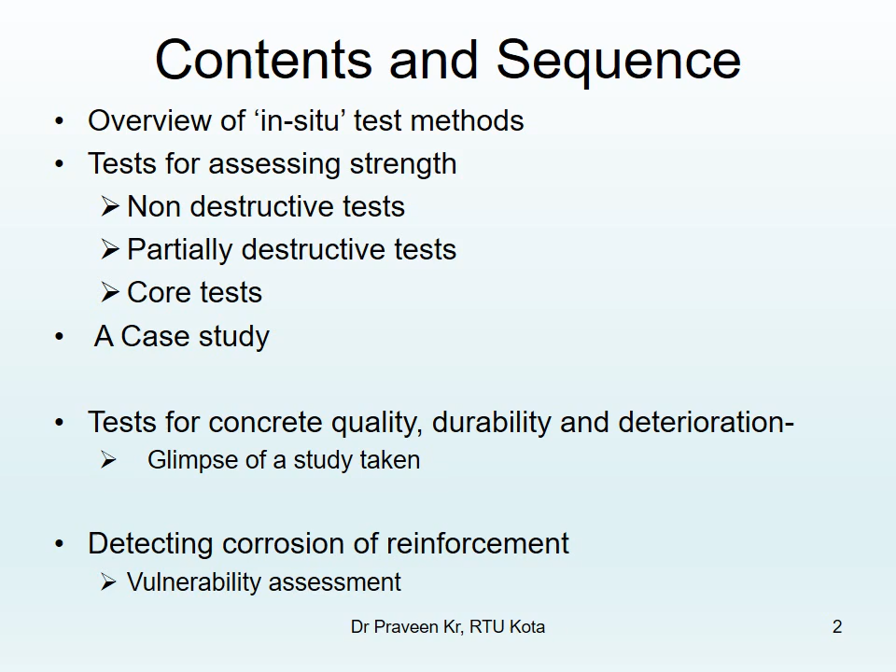Contents and sequence are shown in this slide: an overview of in situ test methods, including tests for assessing strength that are purely non-destructive. This slide lists the different methods. For concrete strength assessment, we have 9 methods.

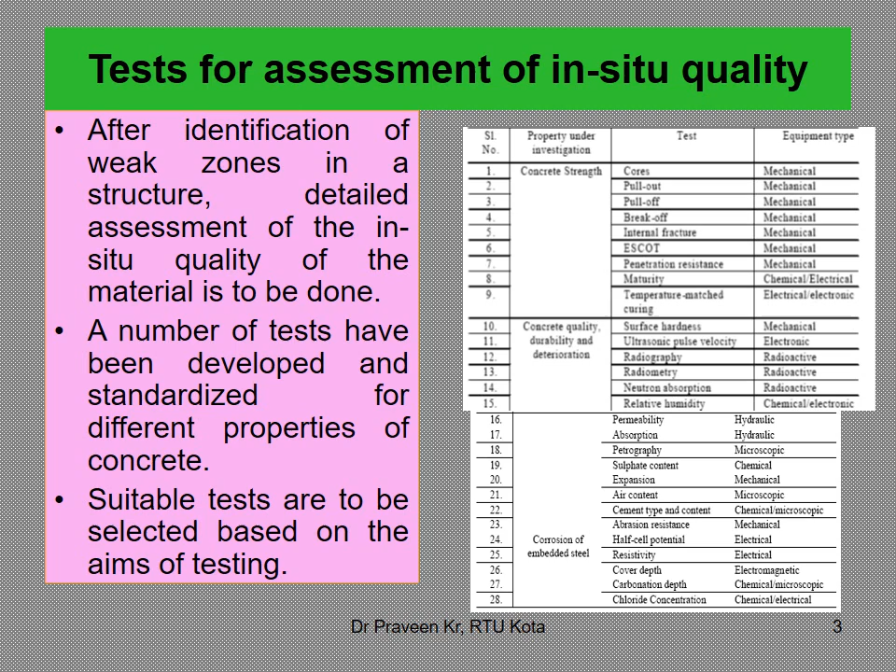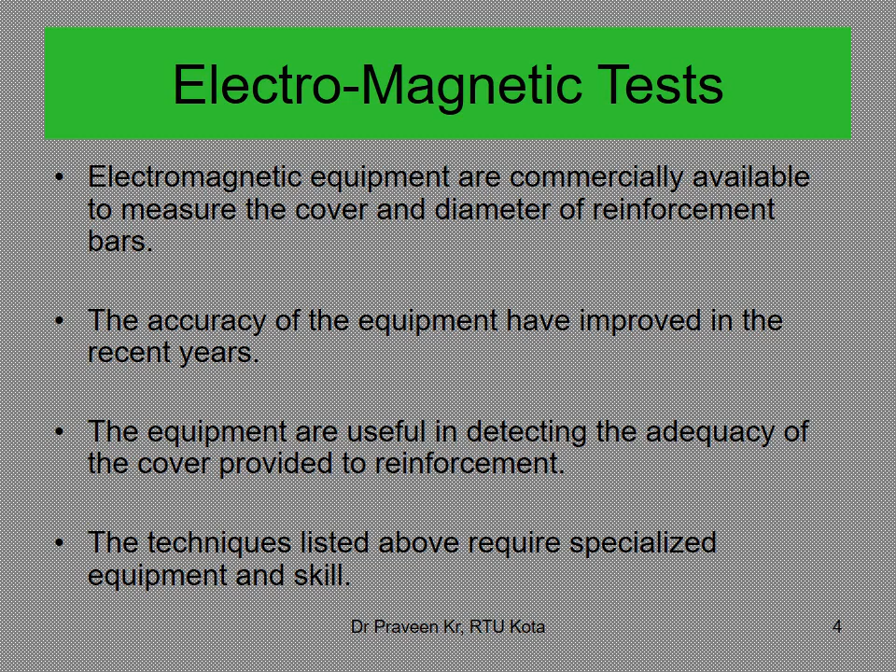Let's start with electromagnetic tests. The equipment is useful in detecting the adequacy of the cover reinforcement. It locates rebars, and measures concrete cover and rebar diameter.

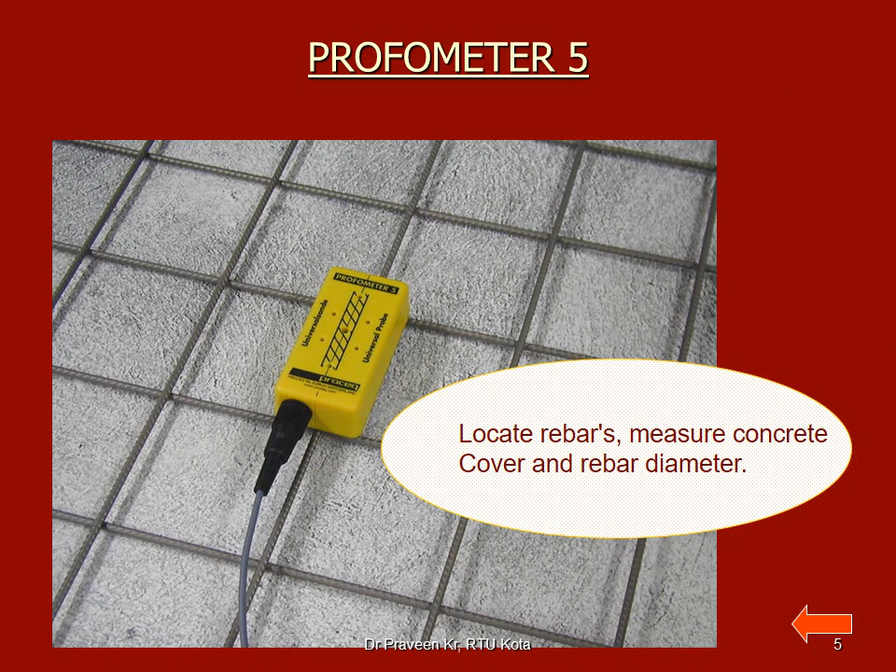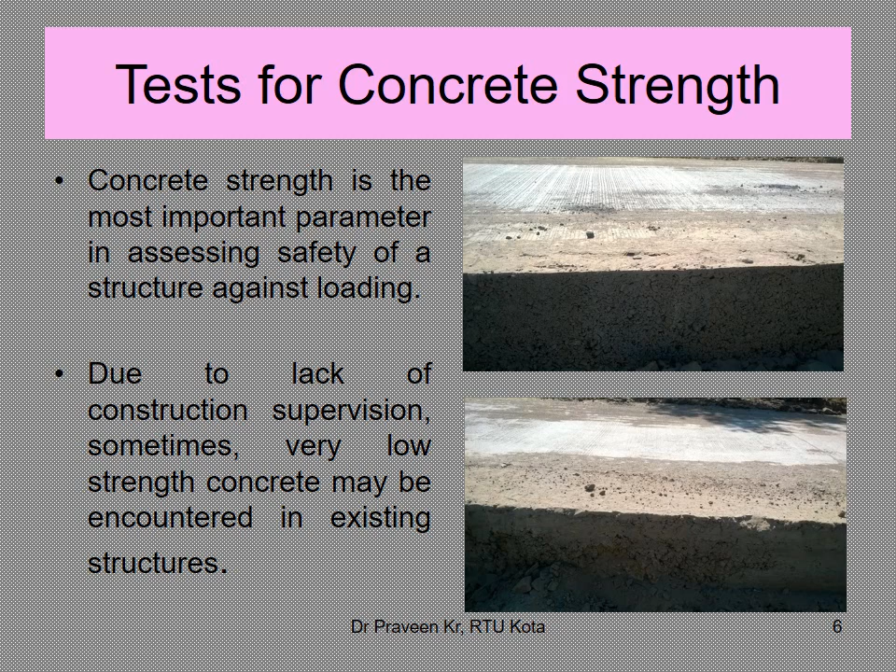Let's start non-destructive test methods for strength assessment. This may be required in the case of small deterioration or distress structures.

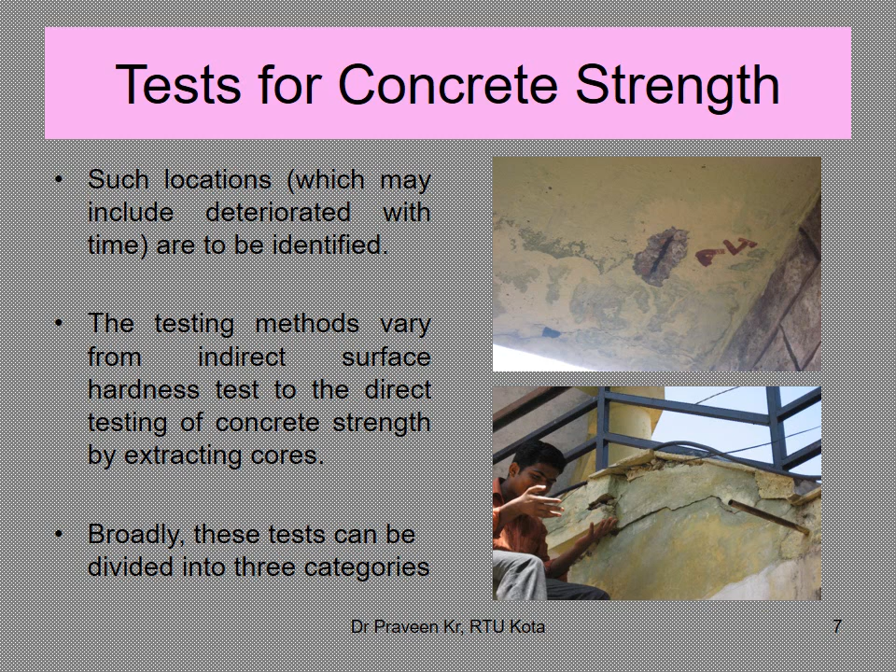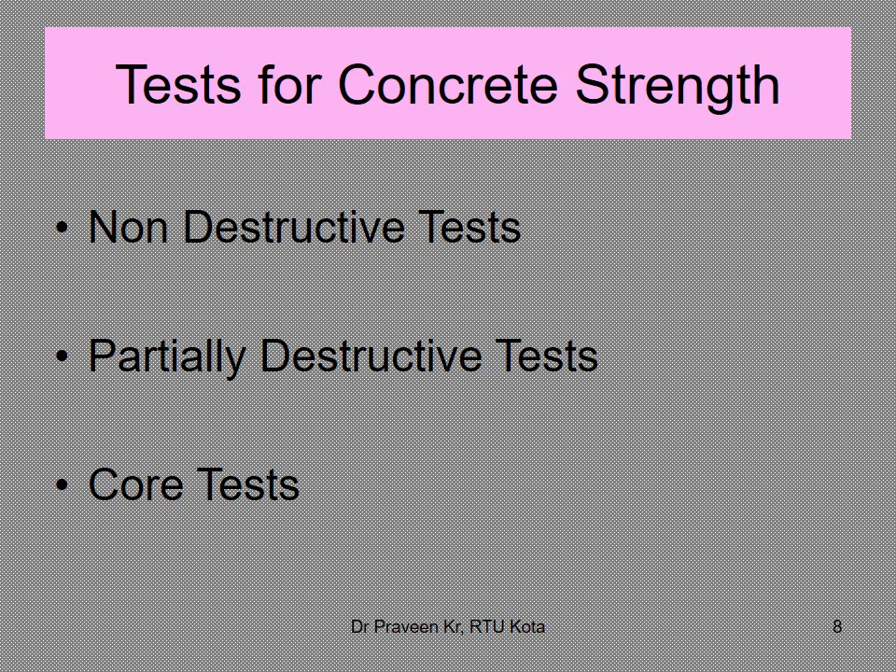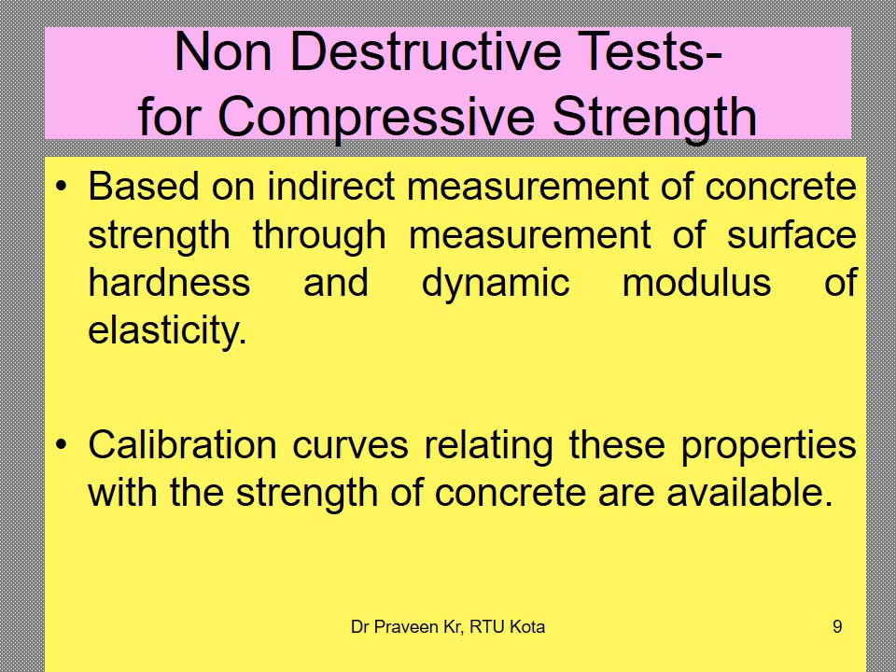Firstly, we shall discuss purely non-destructive tests, which are based on indirect measurement of strength through measurement of surface hardness and dynamic modulus of elasticity. The most commonly used instruments are the rebound hammer test and the ultrasonic pulse velocity test method.

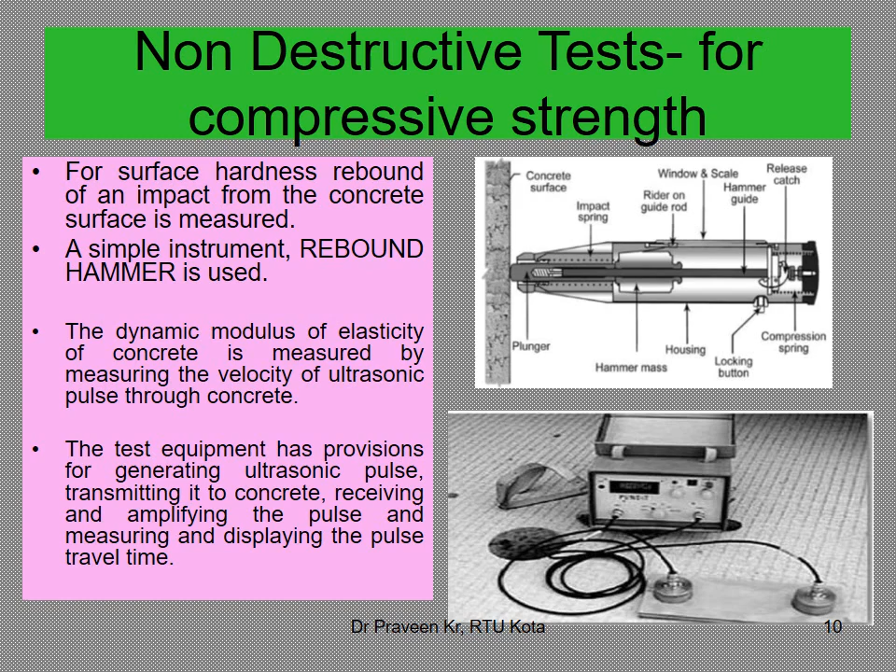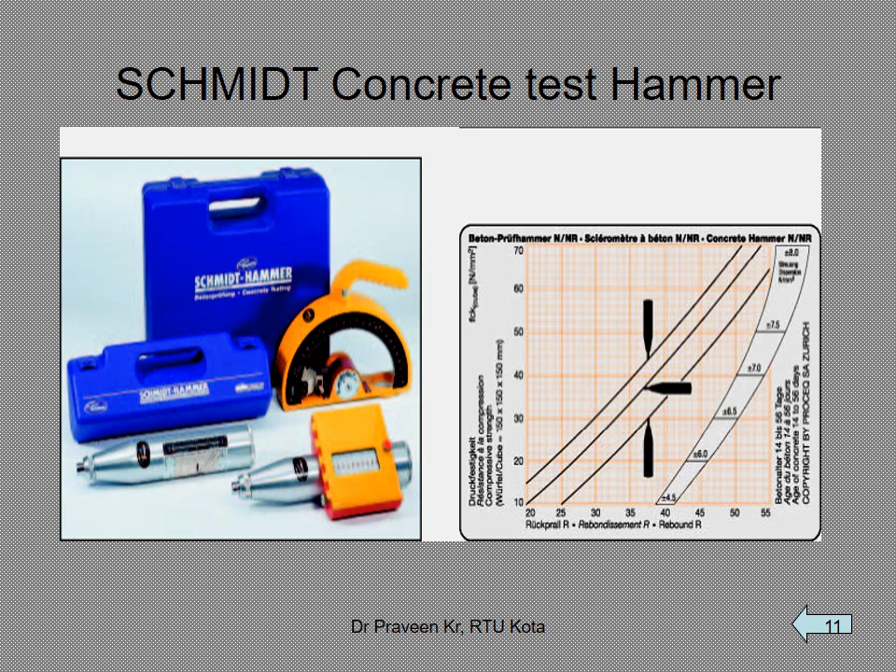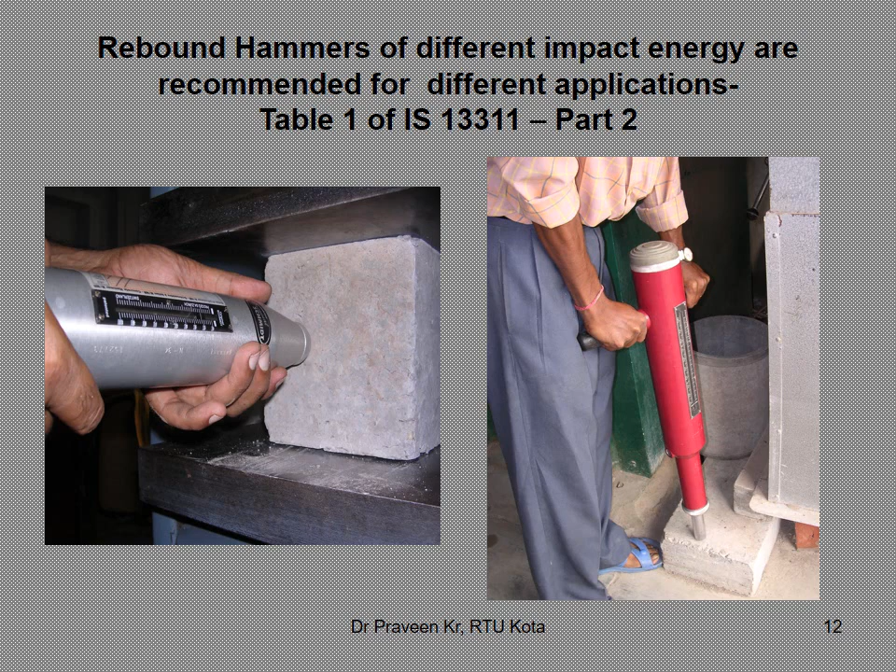Rebound test hammer involves some calibration curves in different conditions. These rebound hammers of different impact energy are recommended for different applications. The right hand side photograph shows a big hammer used.

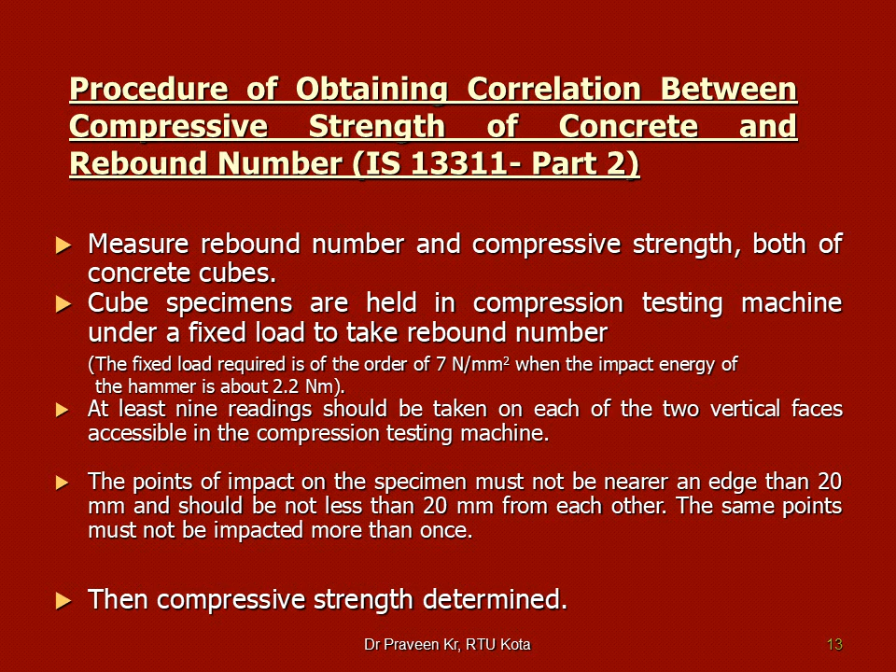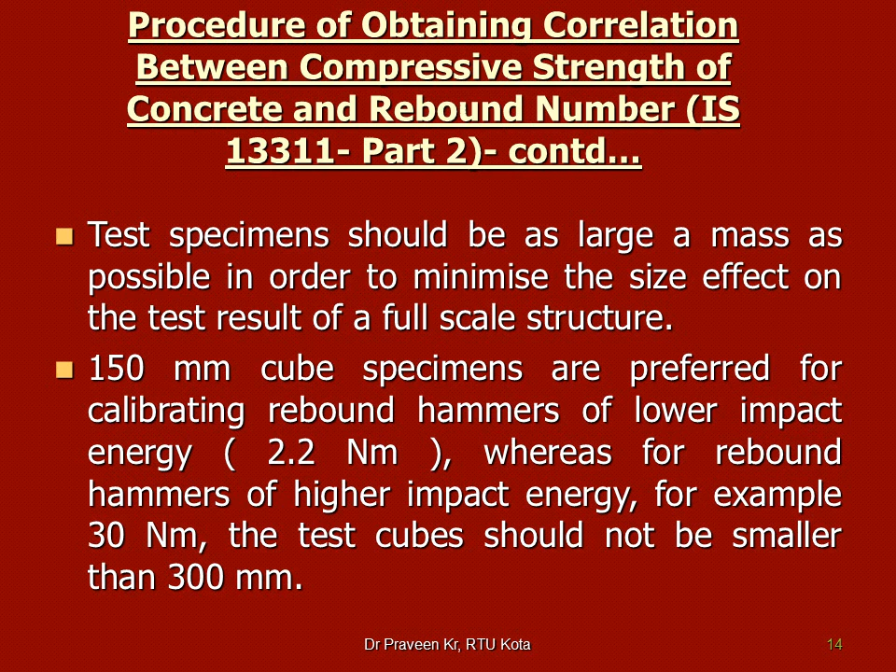The procedure for obtaining correlation between compressive strength of concrete and rebound number is listed in IS 13311 part 2. This involves testing on cubes held in the compression testing machine, taking the rebound number, then testing the cube.

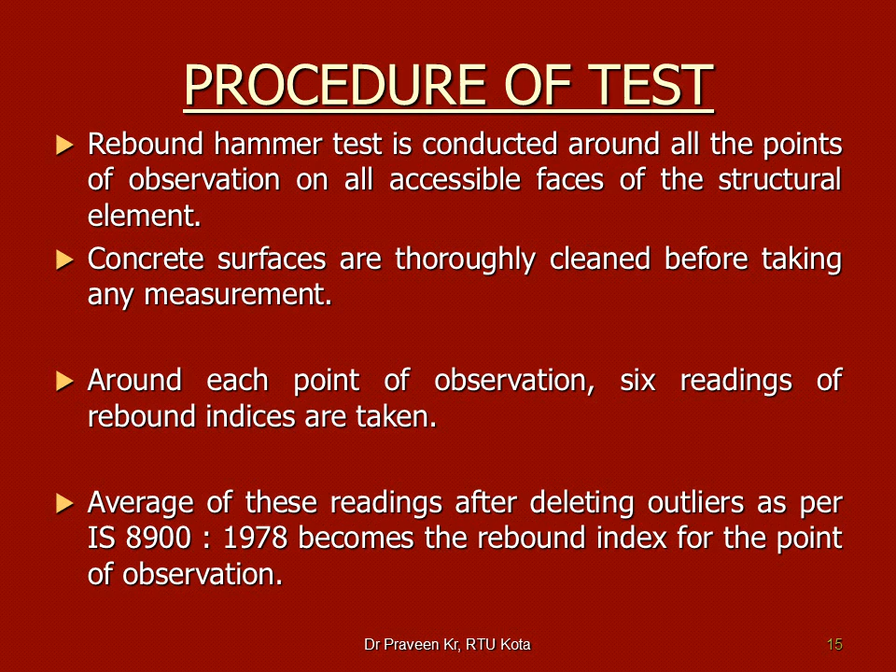In the field, when we use the rebound hammer, at least 6 readings must be taken around each location. We take the average of these readings after deleting outliers.

These two methods are robust and straightforward in application. They are inexpensive and relatively fast.

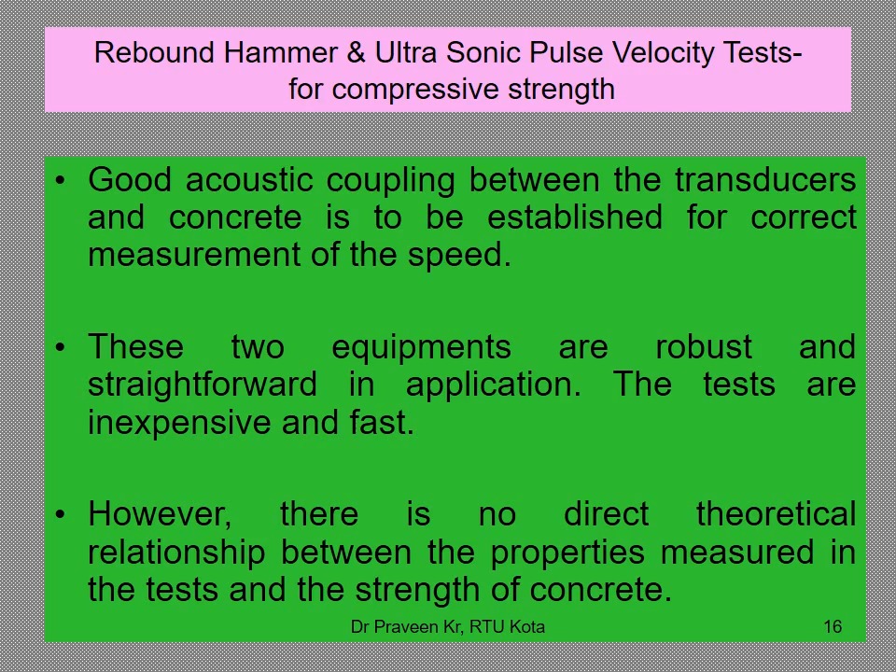As shown in this photograph, the ultrasonic pulse velocity meter has two transducers; one is the emitter, the other is the receiver.

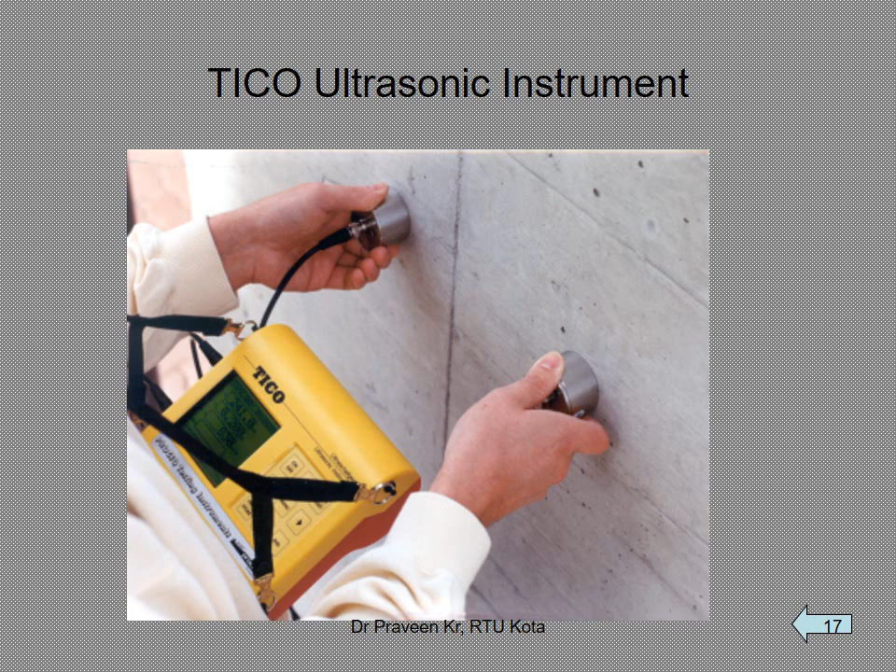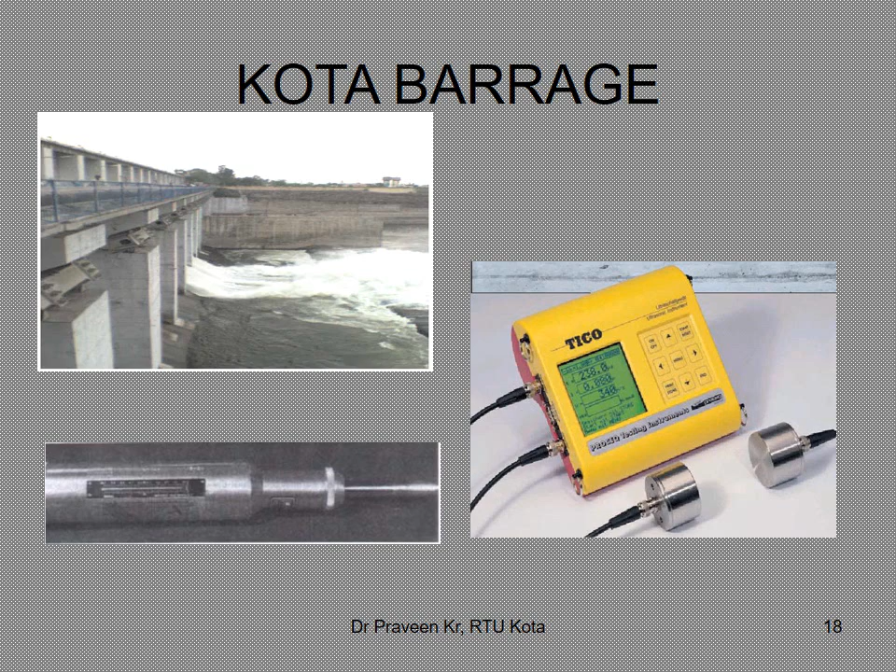We used this UPV and rebound hammer for assessment of the stilling basin of the Kota barrage about 12-13 years ago. Some minor cracks were observed in the stilling basin platform. Our students went downwards and took readings by the rebound hammer, as shown in this third position.

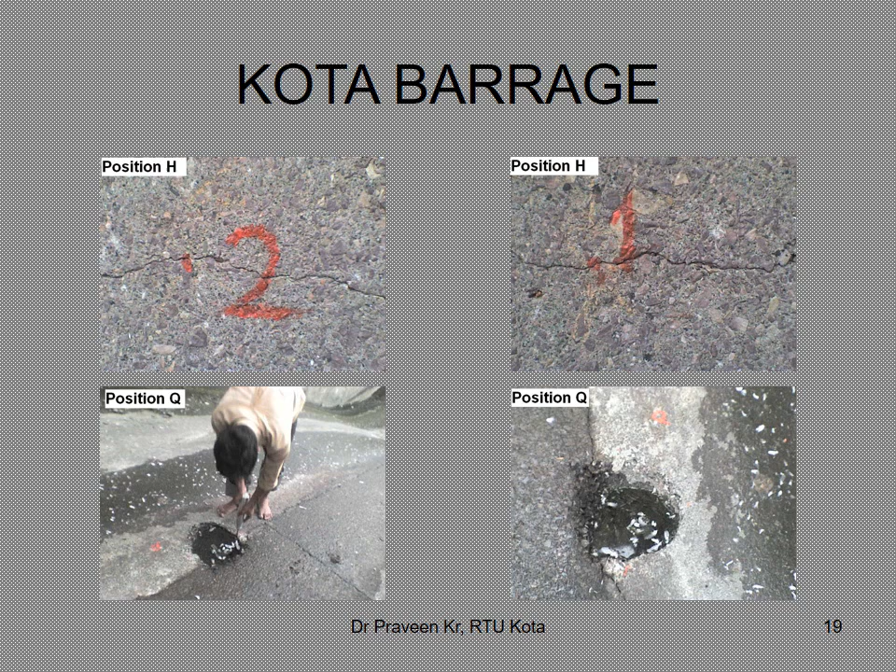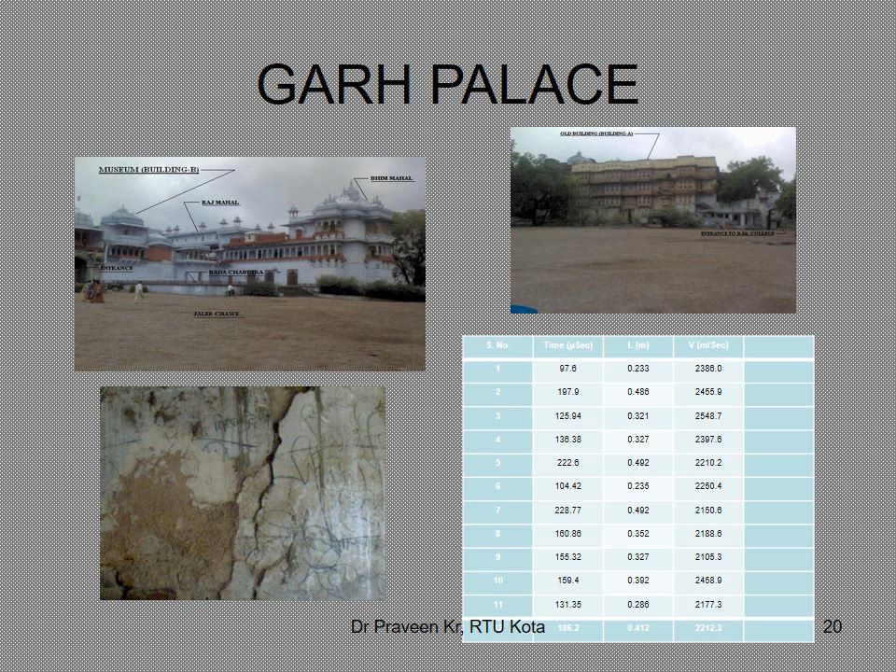Similarly, they went to the Garh Palace structures and took UPV readings at so many places at that time, 13 years ago. However, more tests are required for reliable estimation.

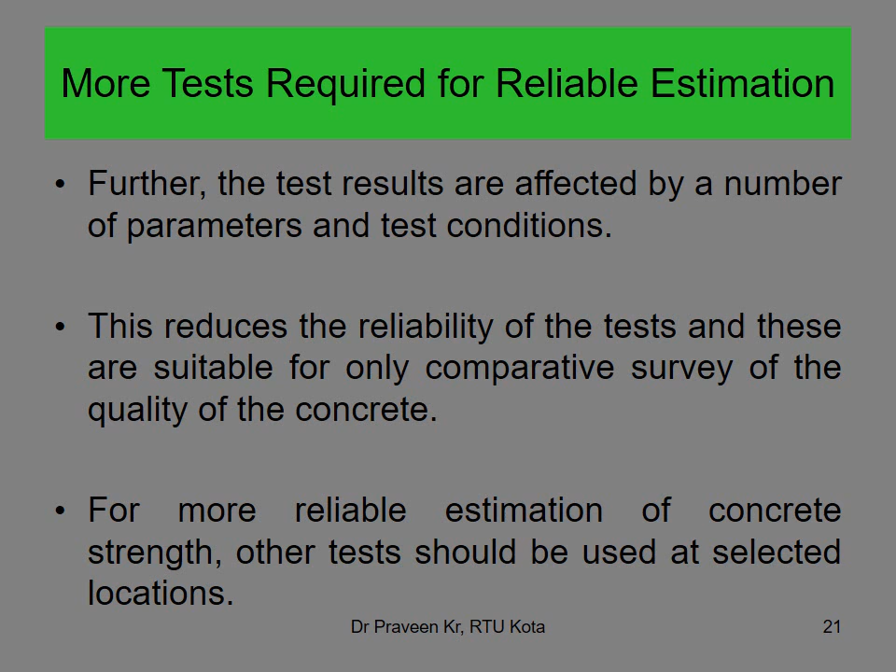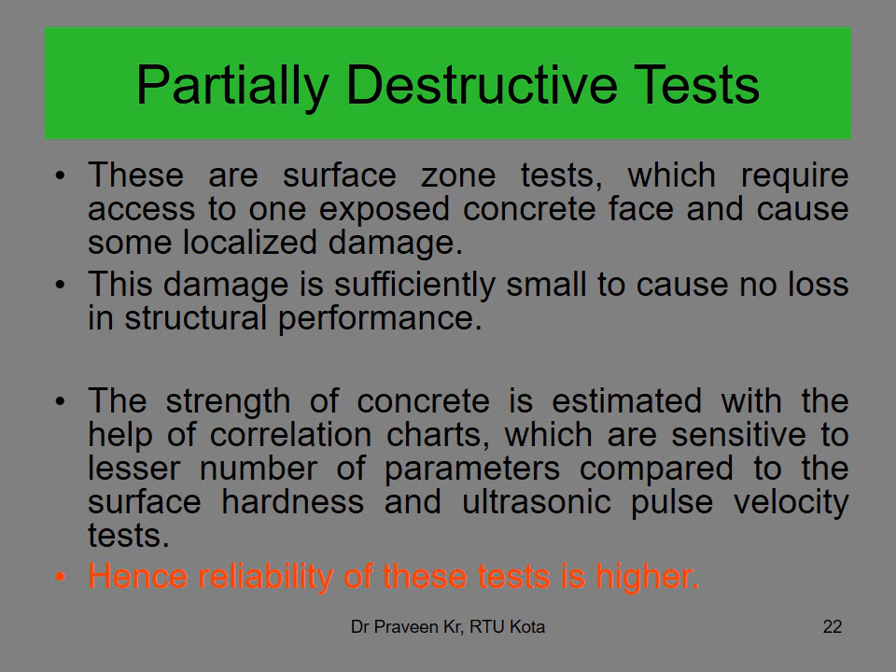Partially destructive tests are generally surface zone tests which require access to one exposed surface, and the strength of concrete is estimated with the help of a correlation chart.

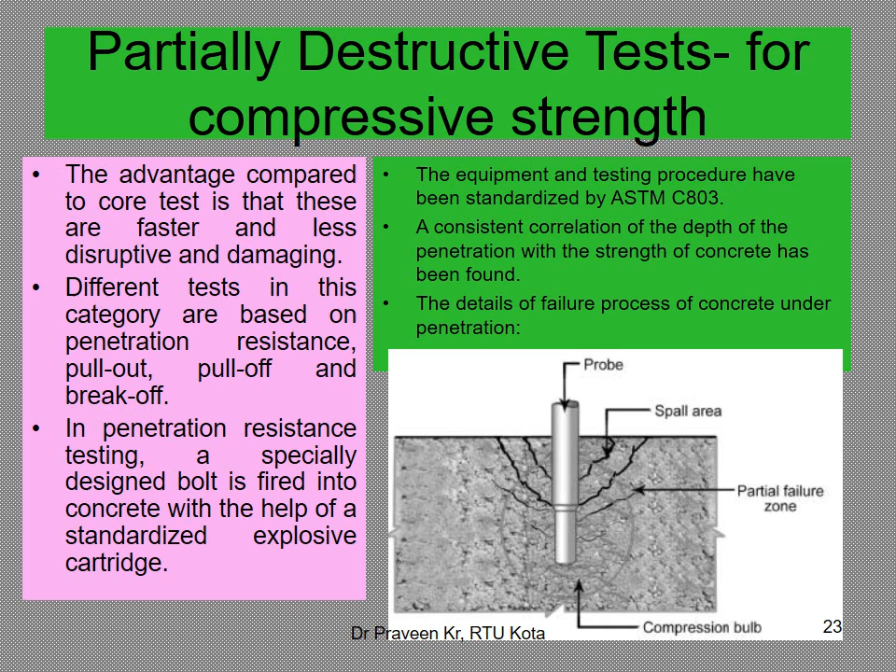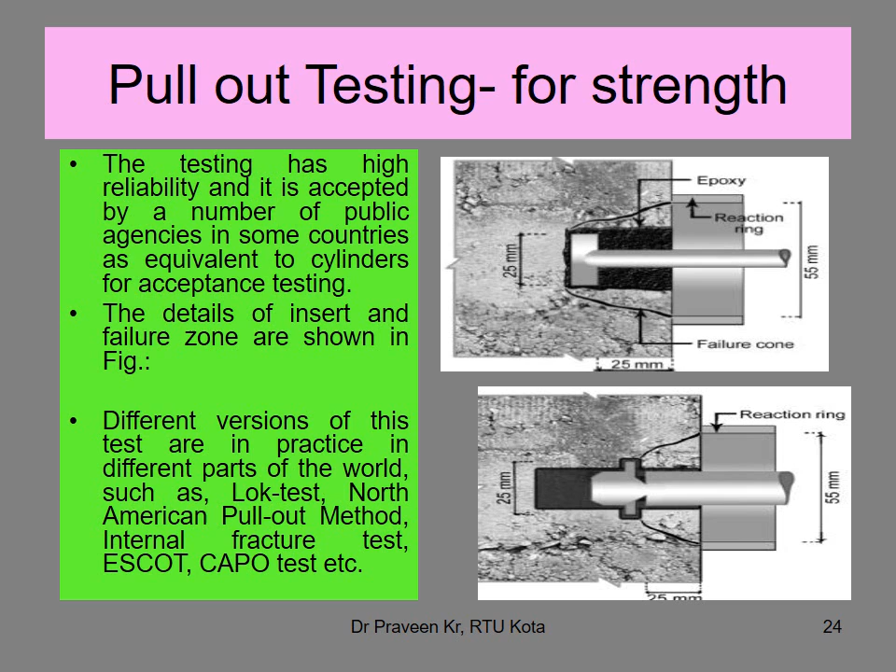This test is based on penetration resistance. A specifically designed bolt is fired into concrete with the help of a standardized explosive. Similarly, this shows pull-out testing for strength, which is in practice in North America.

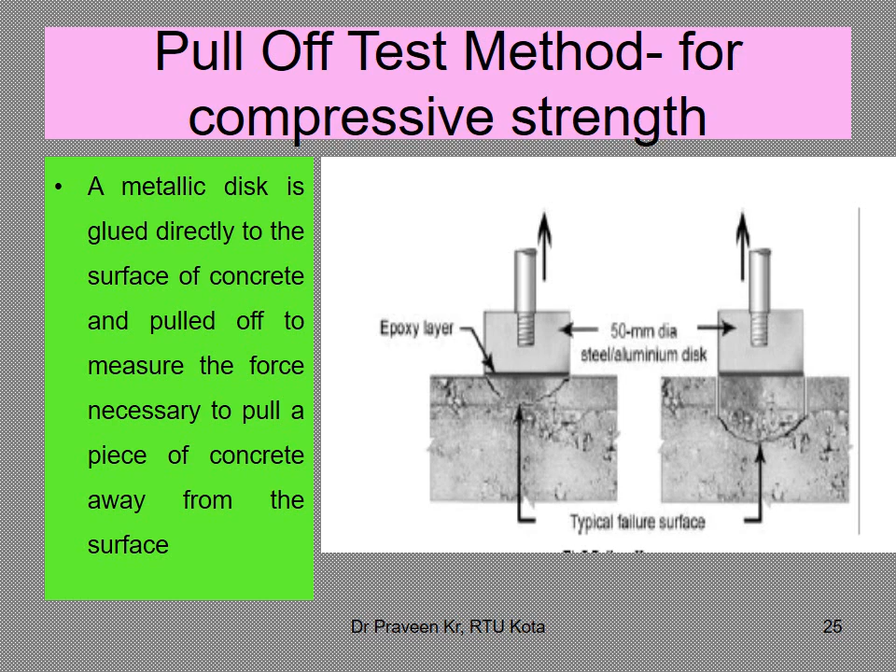Partial coring is done with a standard diameter of 50 mm, and the above procedure is repeated by gluing the disc at the top of the partial core.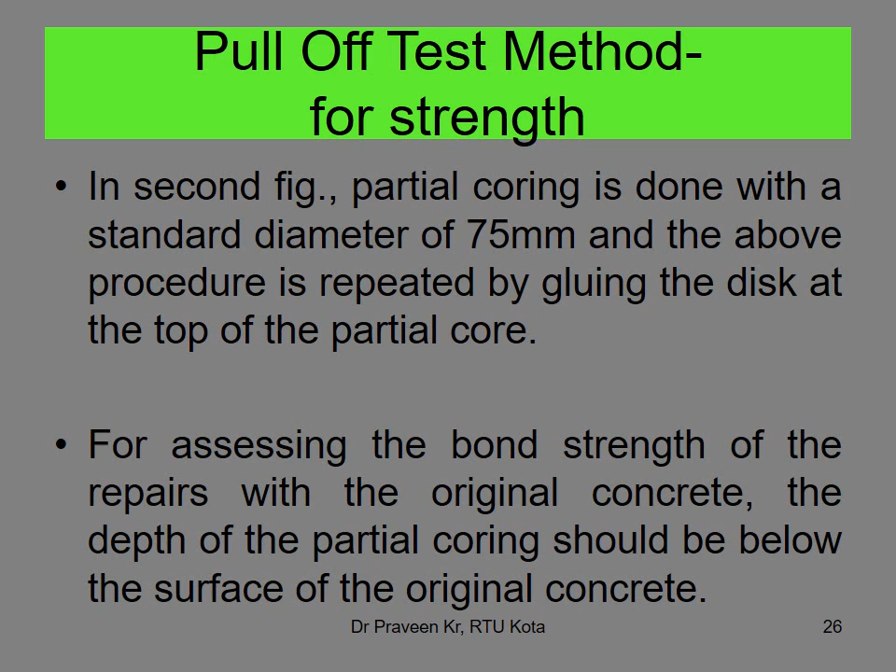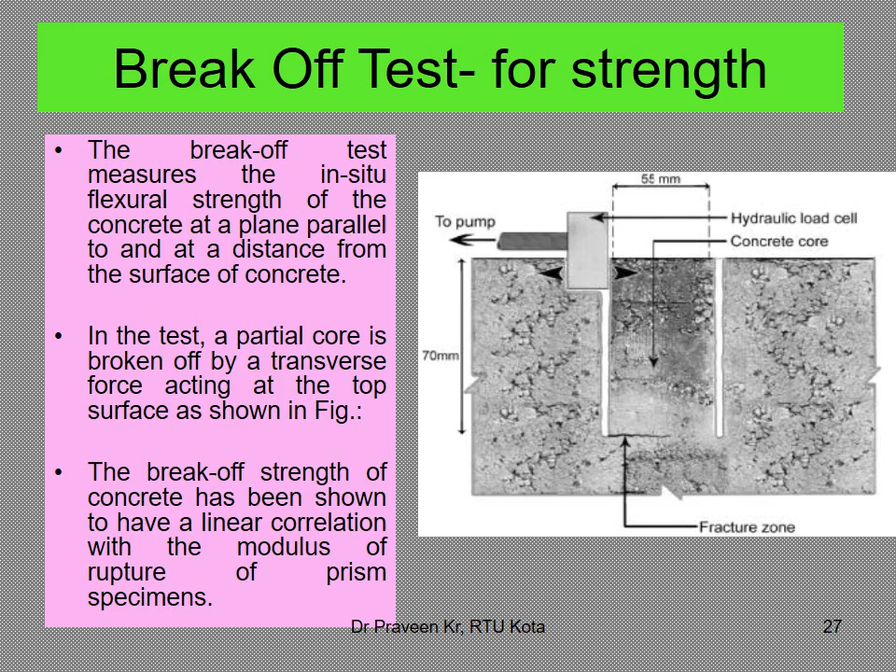For assessing the bond strength of repairs with the original, the break-off test for strength is used for in situ flexural strength measurement of the concrete at a plane parallel to and at a distance from the surface.

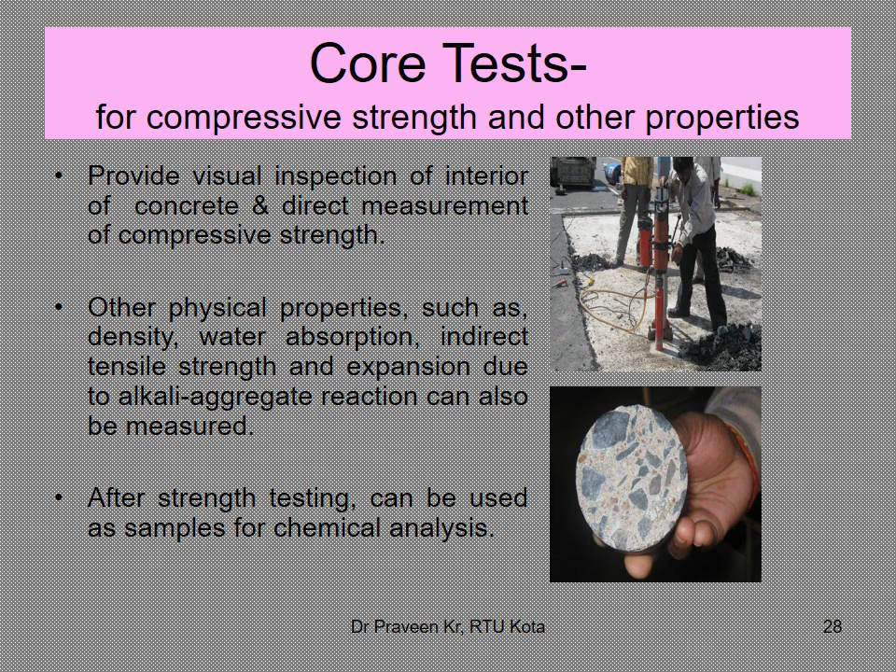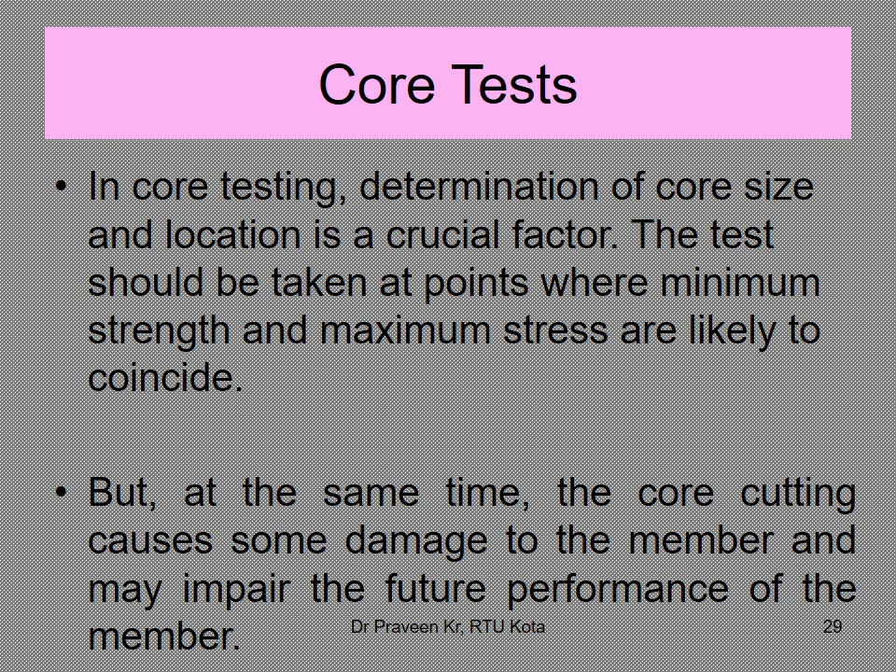Let's discuss core tests which are used for compressive strength assessment in situ and other properties. In core testing, determination of core size and location is important, but at the same time core cutting causes some damage to the member and may impair its future.

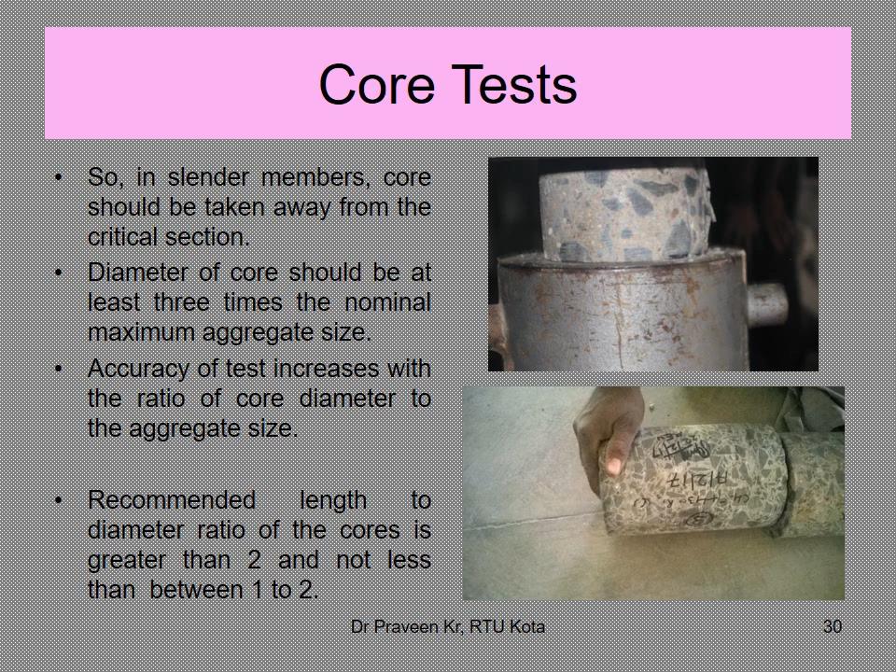In slender members, the core should be taken away from the critical section. Sometimes it is not possible to get a core with sufficient depth, as shown in the figure.

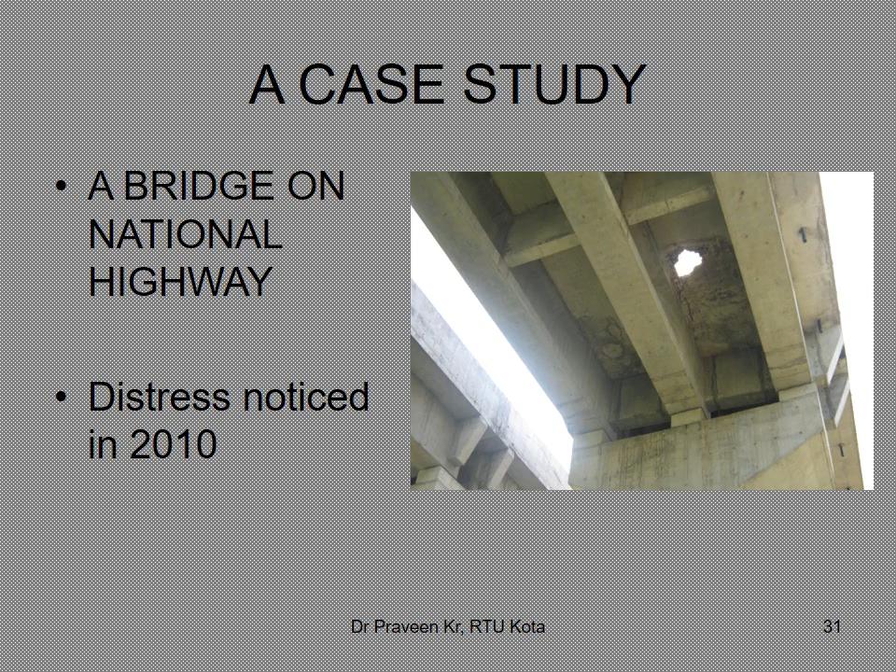Let's discuss a case study of a bridge on a National Highway, where distress was noticed in 2010. Some hole was observed.

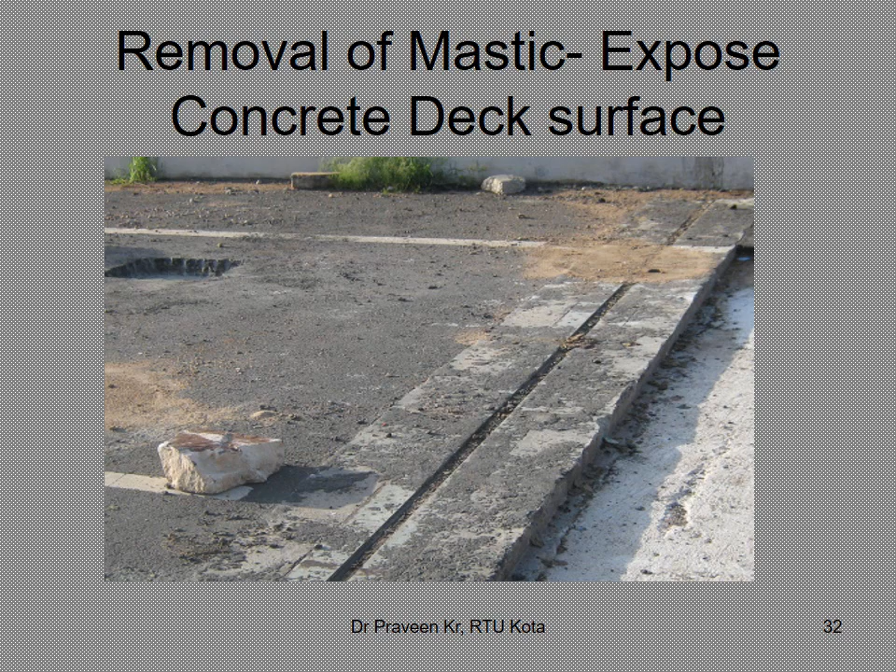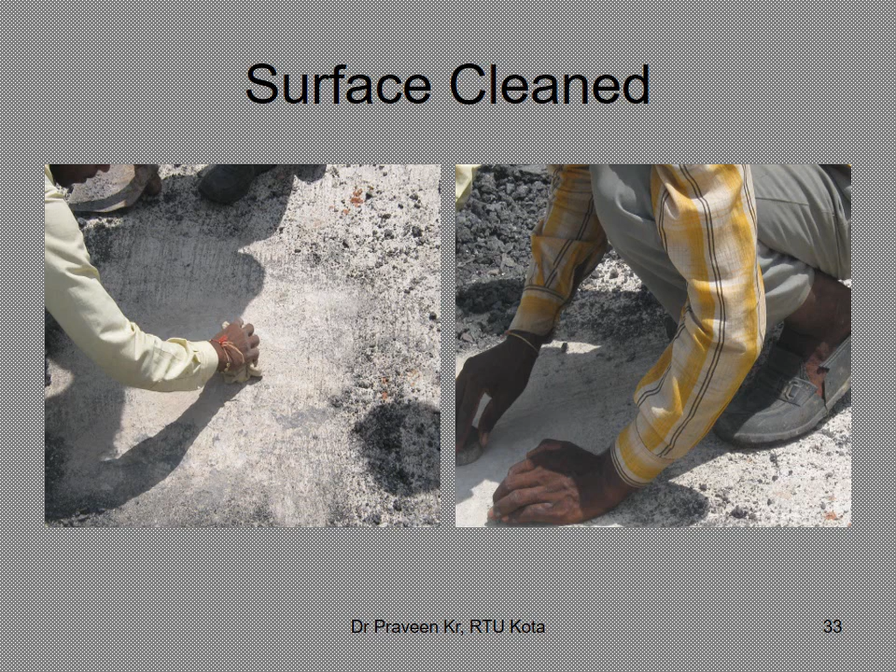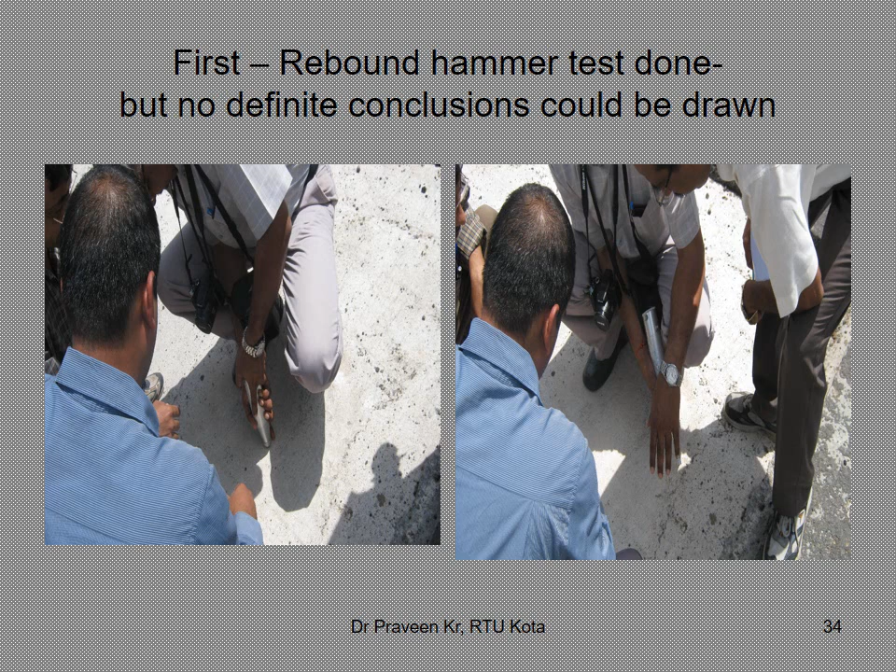To assess the damage, the mastic was removed to expose the surface. It was cleaned, and the rebound hammer test readings were taken.

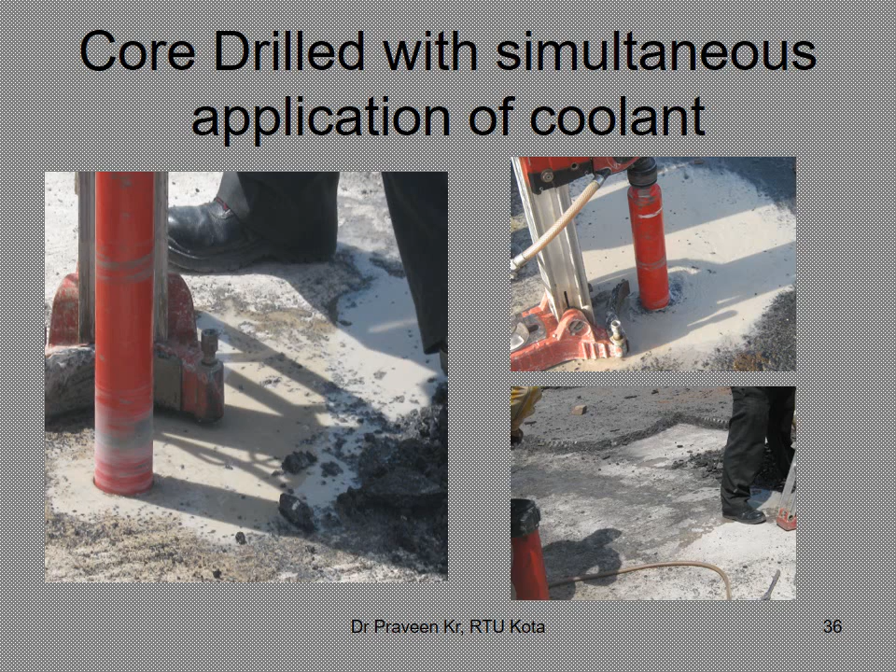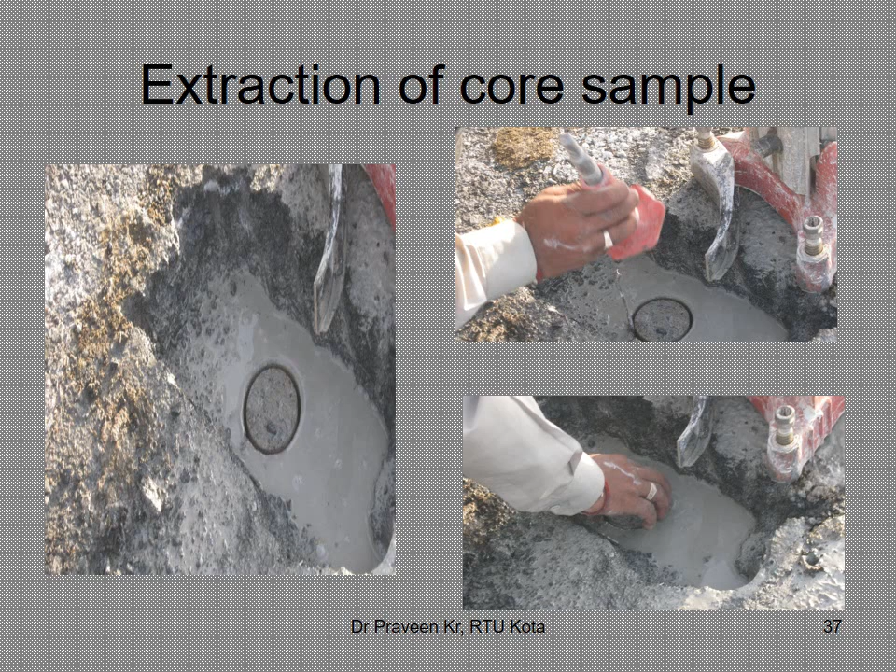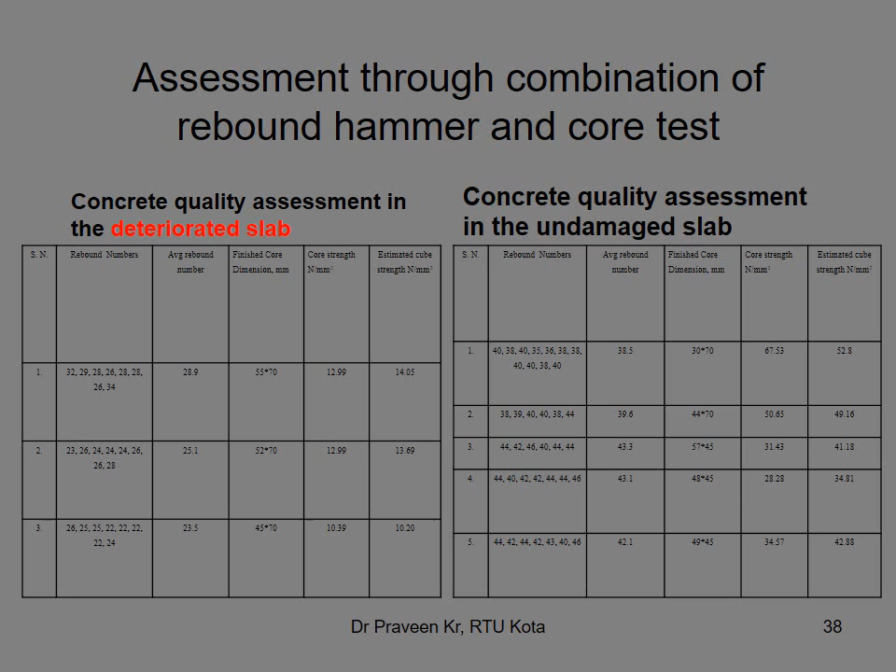This shows the concrete quality assessment in the deteriorated slab. The rebound readings show around 28, 25, and 23 as the average.

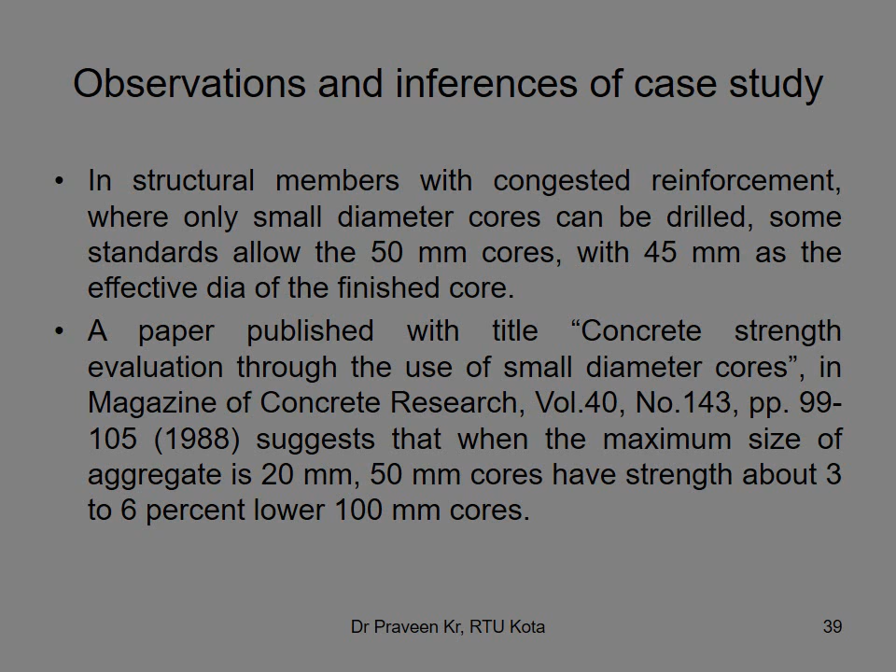So the inference was that the panel was to be removed, and this was accepted by the NHAI, and it was removed and replaced.

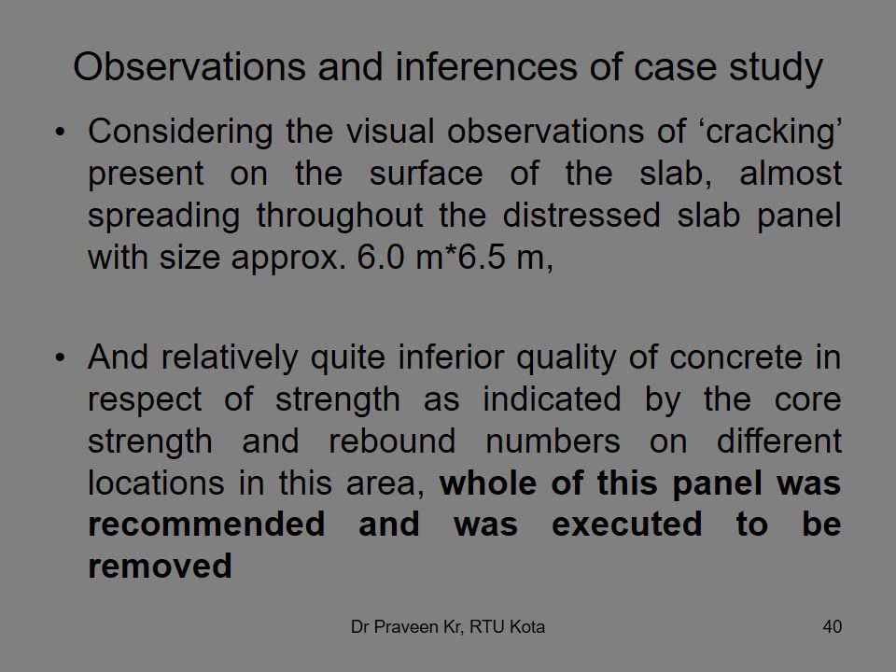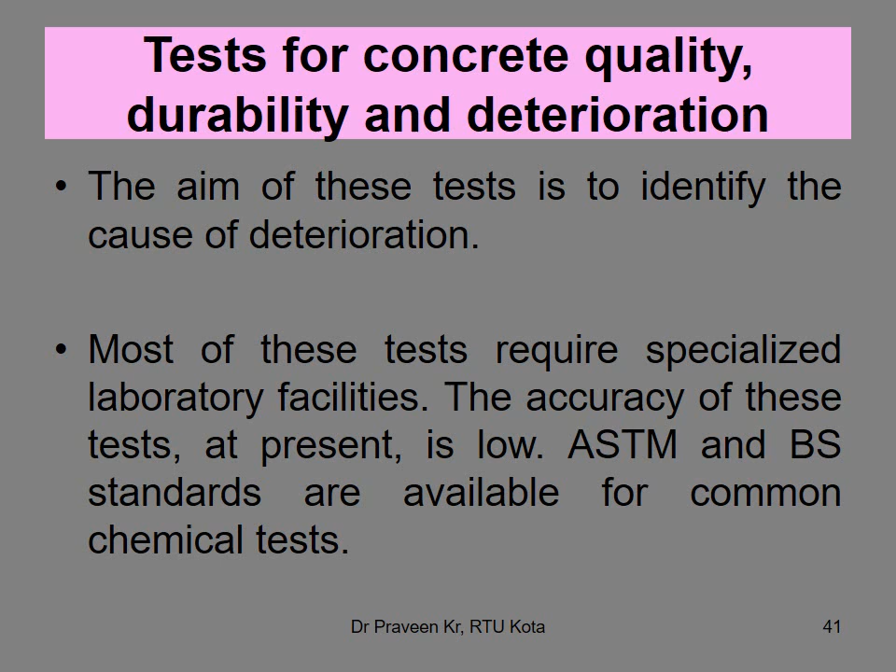Now tests for concrete quality, durability and deterioration. Most of these tests require specialized laboratory facilities, and the accuracy of these tests at present is low.

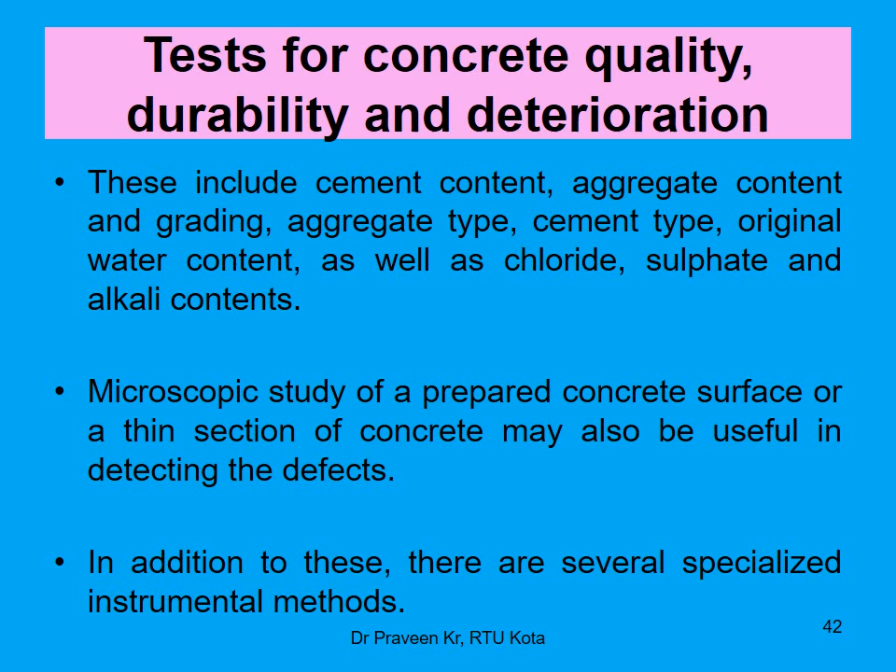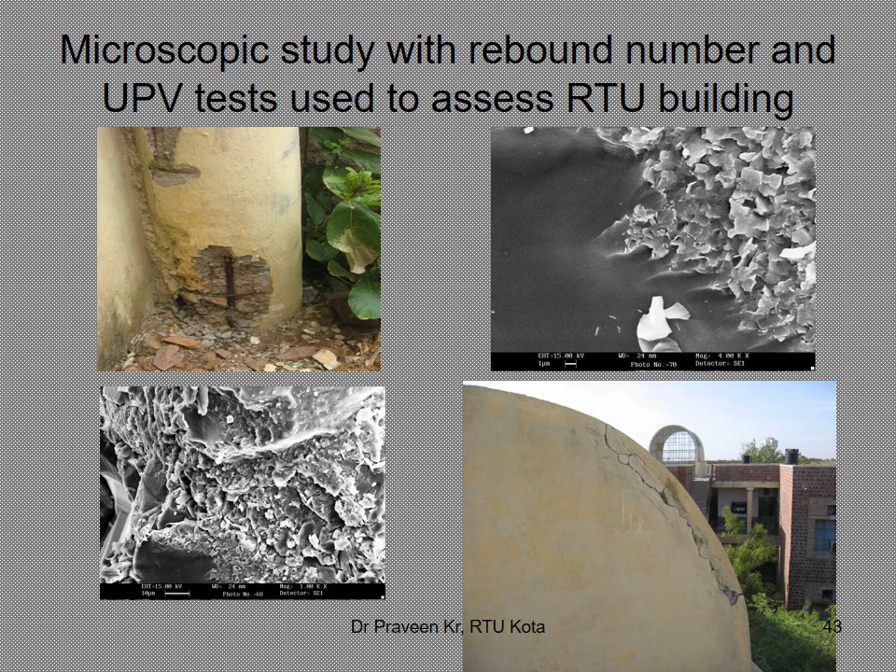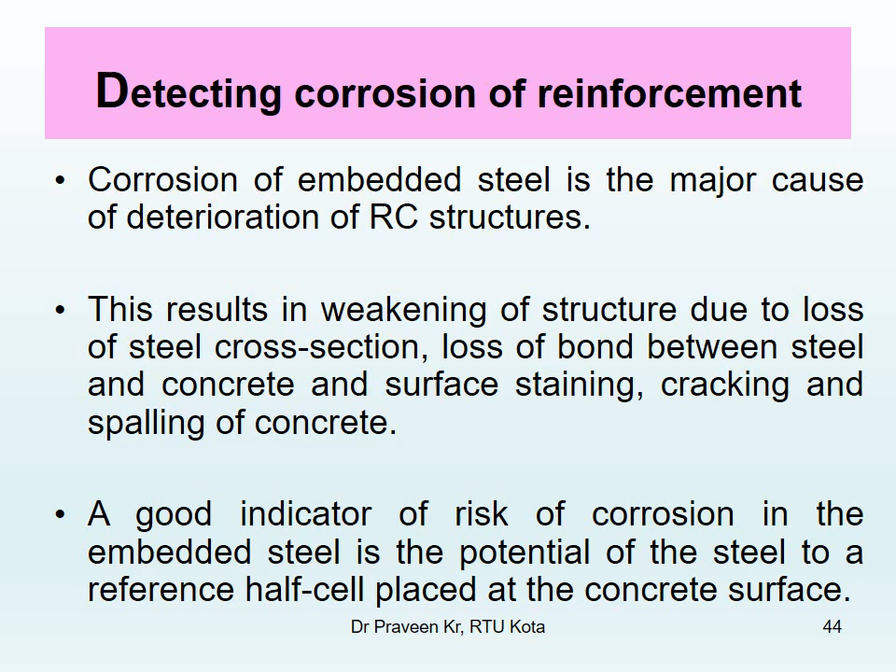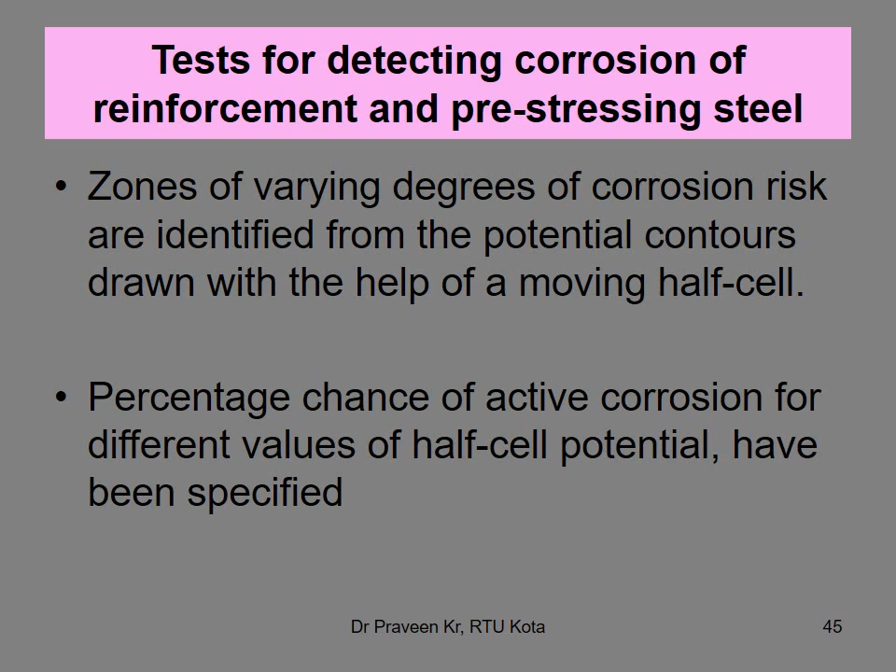If we have to detect corrosion of reinforcement, a good indicator of risk of corrosion in the embedded steel is the potential of the steel to a reference half-cell placed at the concrete surface. Zones of varying degrees of corrosion risk are identified from the potential contours drawn with the help of a moving half cell.

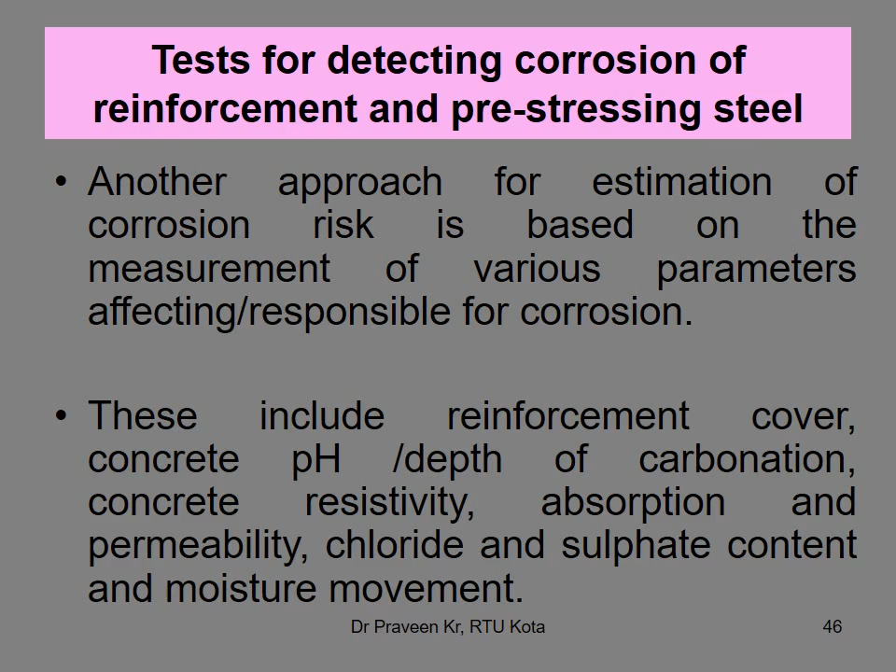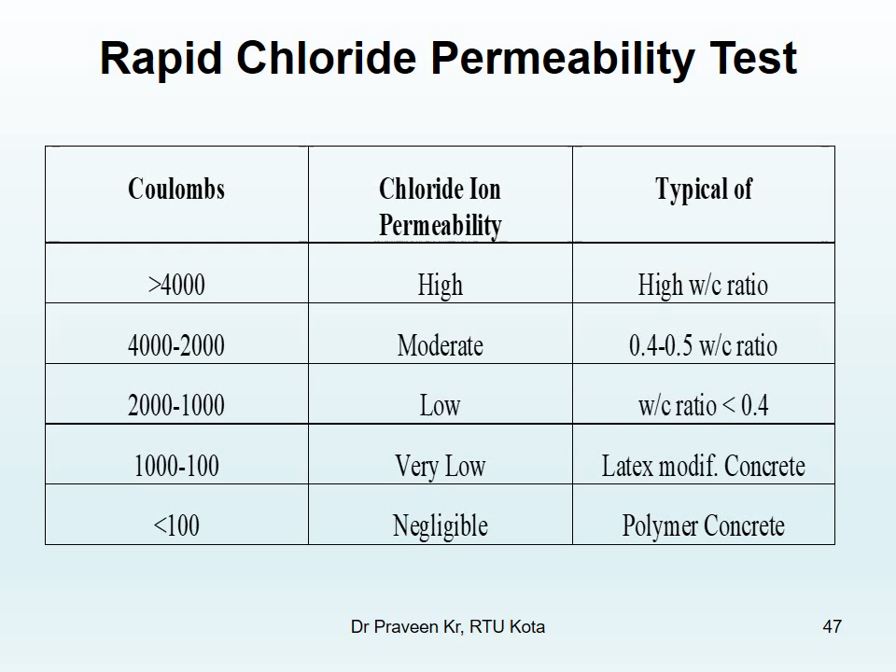For permeability assessment, the RCPT test is the most common. This photograph shows a setup and the principle of the RCPT.

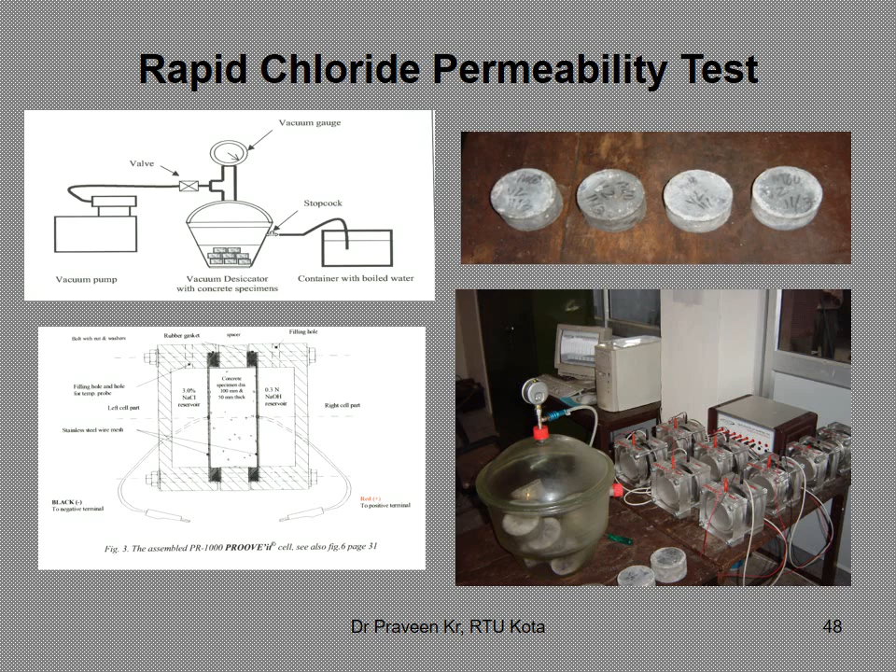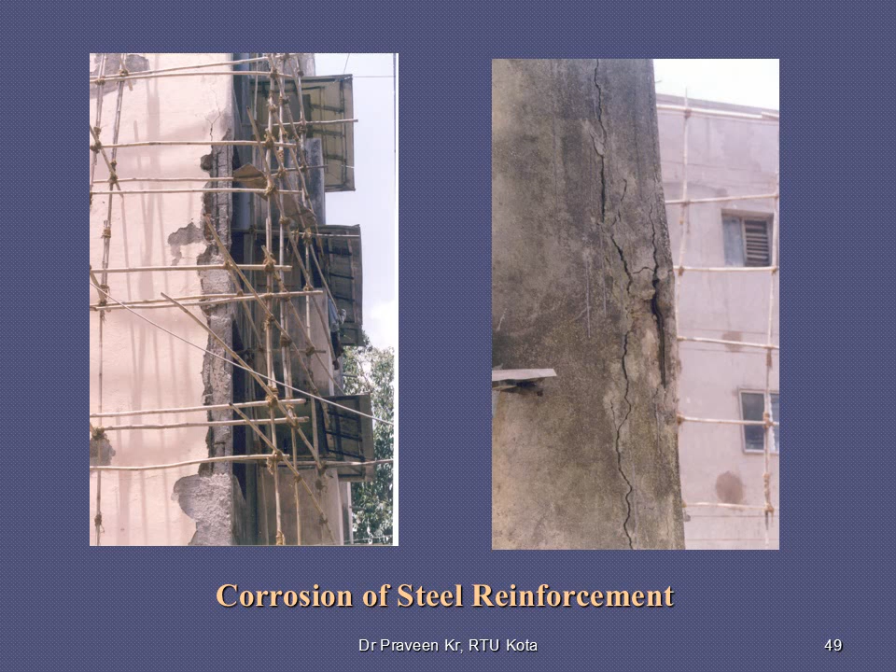Then let's discuss corrosion vulnerability assessment and the state of corrosion through visual observation. If the crack is parallel to the reinforcement, it's a sign of corrosion.